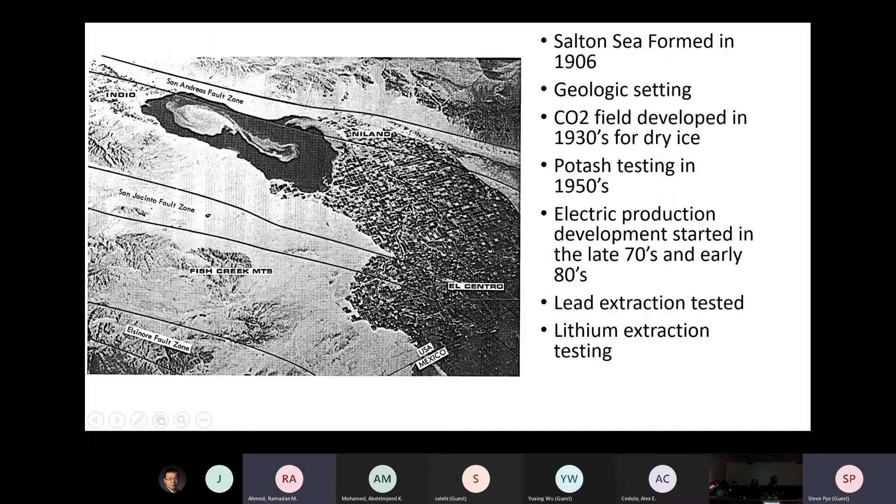So initially, two power plants were built, one on the Brawley field. Let me see if I can go back. Brawley field was in this area up here. The Salton Sea Field was down on the border of the Salton Sea in this area. So two 10 megawatt plants were built. One was on the Brawley field, one was on the Salton Sea Field.

And their contracts were conventional. The plants, which were operated by Unocal, sold steam to San Diego Gas and Electric in the case of Brawley, and Southern California Edison in the case of the Salton Sea. And those two utilities operated the respective generation facilities, turning the steam into electricity. And they were our partners in developing these geothermal resources.

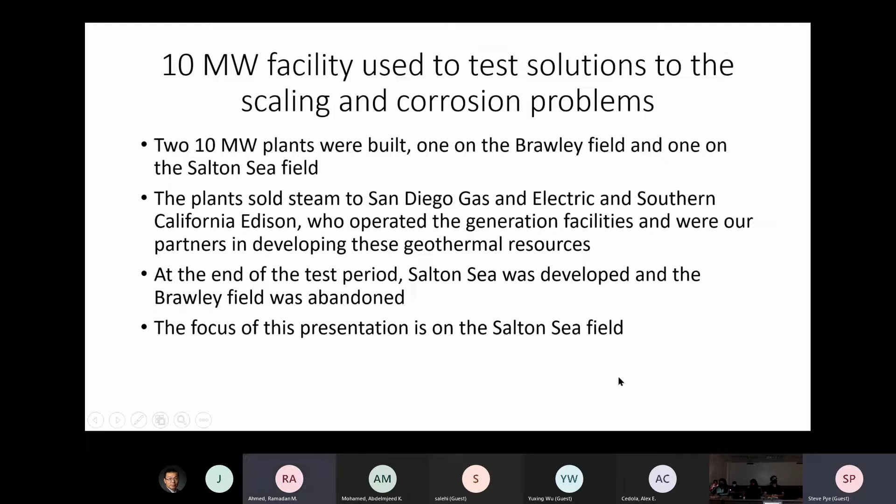At the end of the test period, it was decided to develop the Salton Sea and abandon the Brawley field due to its scaling and corrosion problems being worse than the Salton Sea. The focus of this presentation is on the Salton Sea, but I'll talk about Brawley a little bit from time to time too. So the two problems were corrosion and scaling.

So initially we used carbon steel casing as a sacrificial tubing string, and we used 7-inch to 13 3/8-inch casing hung from the surface as tubing, and it had to be replaced every 1.5 years on production wells and every 2.5 years on injection.

The corrosion on the carbon steel casing was wall thinning, which makes retrieval difficult because it gets so thin that when you put the slips in the table, it crushes the casing. And we had one incident where the well kicked and it wadded up all that casing underneath the BOPs. So that wasn't working very well.

Our corrosion research lab suggested we test 9-chrome-1 moly as kind of the next step up that might resolve the problem. And so we retrofitted the entire Brawley field with 9-chrome-1 moly, and it failed in 1.5 years. If you want to put lipstick on the pig, pitting corrosion was substituted for the general corrosion, so we didn't have any trouble retrieving the casing anymore. But it wasn't lasting any longer, and it cost a lot.

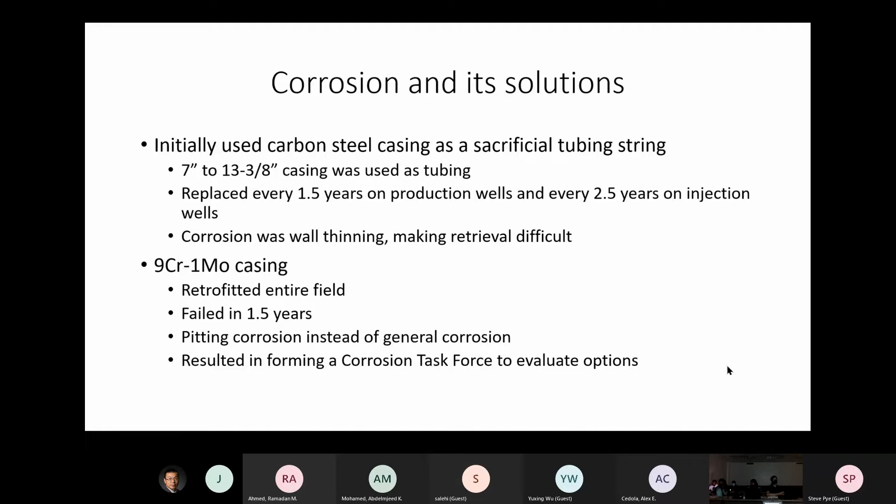So the task force had kind of a disagreement with management, and management came to accept our goals for this task force. There were people in management that thought that we should just figure out what we could afford and run that in the well, and if it didn't work, we quit. And what the task force decided is we needed to figure out what would work and then figure out if we could afford it. So it's a little different sequence.

So we started testing alloys. We ran alloy coupons downhole and pulled them out, and we discarded a bunch of alloys based on either crevice corrosion or cracking or accelerated corrosion. And the next test on that remaining list was to run 2 3/8 inch alloy tubing inside the 9 5/8 inch carbon steel tubing. In that case, we were able to examine the pitting on the outside in a full-size sample. And that further eliminated what we were actually going to test in the end.

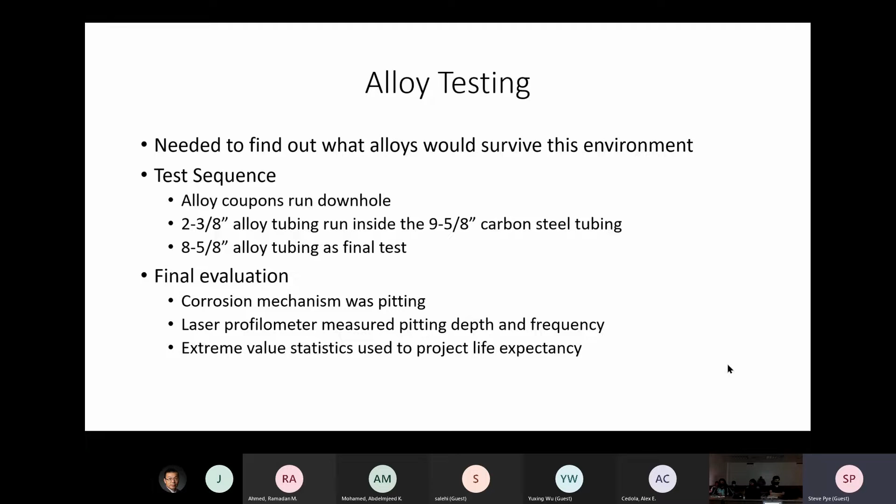So two alloys of the ones we were testing had a projected 30-year life: Beta C titanium and Hastelloy C276, which is a cobalt alloy. We ended up installing Beta C titanium in two wells.

And the Beta C was quite expensive. And so we were looking at ways of reducing the overall cost. And we did some experimenting with polymer concrete lined pipe. That's a styrene carrier and Portland cement as a particle inside it, and then it's spun at high speed and lines the interior part of the pipe.

And there was an overlay of Inconel 625 on the inside of the connections, and an elastomer that went between the joints. Then it was hung from the surface and went down into a Beta C polished bore receptacle. The seals on that polished bore receptacle were chevrons composed of carbon impregnated Inconel 625 wire.

So everything was high alloy, and those type of chevrons, of course, have no way to get energized. So you have to energize them with a spring, and so the spring was Beta C Belleville washers. It was run for 2 years, and then pulled out, and then run back. But it always gave people concerns over, well, is it going to get down behind that polymer concrete liner and chew on the pipe?

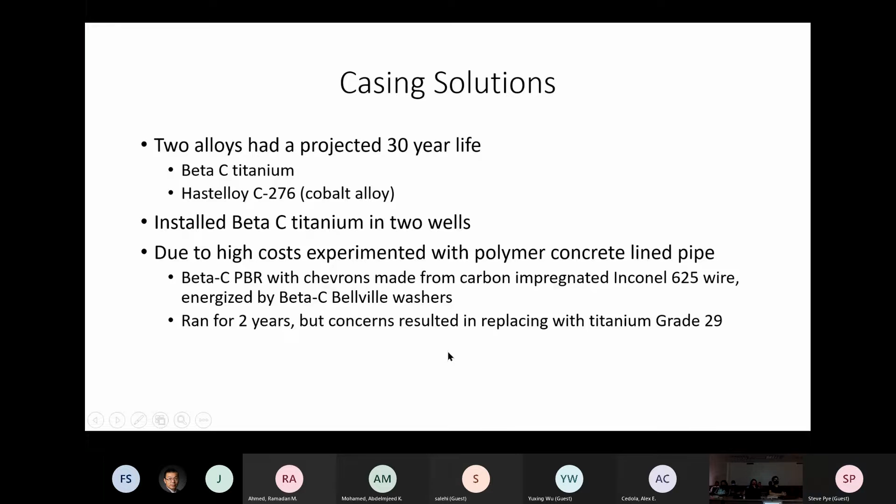And both the titanium manufacturer and our corrosion research people felt like it would survive fine if we went to grade 29, which adds a dab of palladium or ruthenium to the 6.4, and that turned out to be true. But we didn't initially test it because we didn't have that available. It was under test at the time we sold the project to CalEnergy.

So we get to this point of, okay, we've got a couple of wells with Beta C, and the rest still have carbon steel tubing strings. And if you have to do a well workover every year and a half, and you don't have enough in the budget for that, you sometimes let it go on too long. And then the tubing falls apart, and the cemented carbon steel casing gets exposed to the corrosive brine.

And in one case, it perforated that outer carbon steel casing and pressured up a shallow zone. And when somebody drilled a well into that shallow zone, it resulted in a blowout, and the rig cratered into the hole. And so it was decided that we needed to retrofit all the wells with grade 29.

And the Beta C, it's been long enough now. The Beta C's lasted 20 to 30 years. The grade 29 has lasted about 30 years. So it's also at about the end of its life now. We ran similar experiments on the injection wells, and ended up with 2507 duplex stainless steel casing as the preferred alloy.

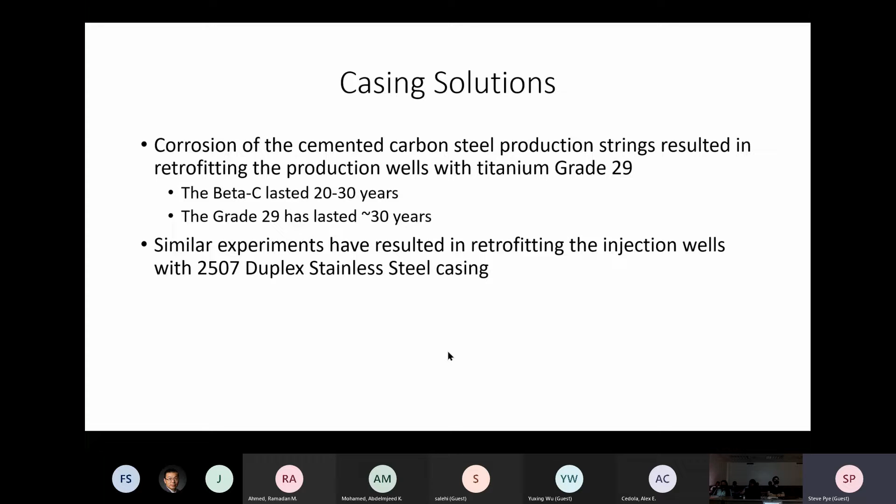So then it came, well, okay, none of this is cheap. What can we do to reduce the alloy part of the well costs? Well, we were at a significant advantage because the wells produce open hole, so we only had to case with the alloys to the top of the reservoir. The other part was doing a bunch of wellbore modeling and reservoir modeling, because if we could get more megawatts per pound of alloy, it would reduce the cost of the well field.

And so the larger diameter production wells will produce more with less alloy if they have enough productivity, KH, permeability thickness. And the problem was the production becomes inhibited by the friction pressure drop in the two-phase region of the wellbore. So briny salt water comes in the bottom that's hot, about 580 to 600 degrees Fahrenheit. It travels partway up the well where the pressure drops, and part of it starts to turn to steam.

Then you're flowing at very high velocities with a steam and water mix. And that steam and water mix creates a lot of friction pressure, which then limits the amount of drawdown you can put on the reservoir. So for the most productive wells, it looked like 16-inch casing was the best size to minimize the costs, and 13 3/8 casing for the less productive areas.

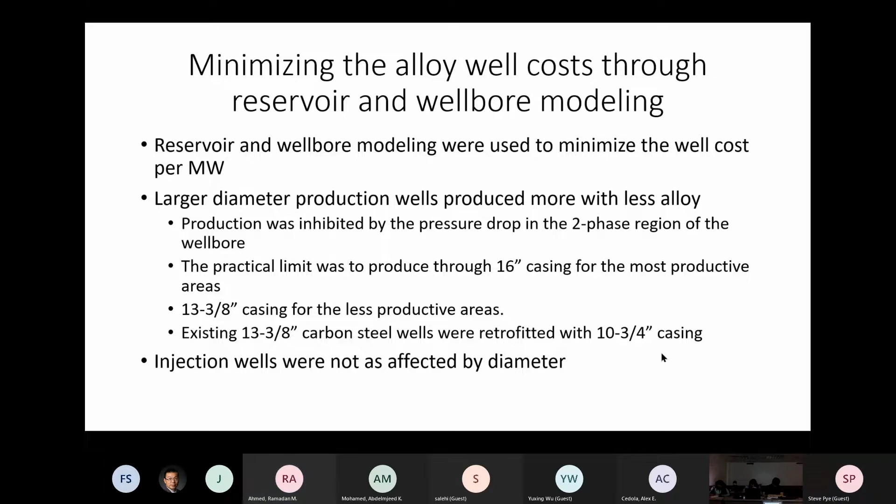So, like we talked about, what can you afford? And there's been some changes in the contract terms. As I talked about a minute ago, original contracts were steam sales agreements with utilities. That is, we developed the steam field and we sold steam across a fence line to the utility at a certain price per

pound. What happened was that we went into a period where the utilities were forced to become transmission facilities and they had to sell off all their generation facilities. For the transition, there was what was called a standard offer 4 contract available for a 10-year fixed period to bridge the transition from the current system to the independent system operator, ISO market, we have today in California.

Unfortunately, the pricing under the ISO is marginal to the Salton Sea resource at the current time, which has limited the amount of development that has occurred.

So one other thing that we probably need to discuss is what are the differences between some of these things. And thermal stress is an important factor. The thermal stress is the modulus of elasticity times the coefficient of thermal expansion times the change in temperature. And so if you're going to do it in degrees Fahrenheit for the coefficient of thermal expansion, then the temperature change is also in degrees Fahrenheit.

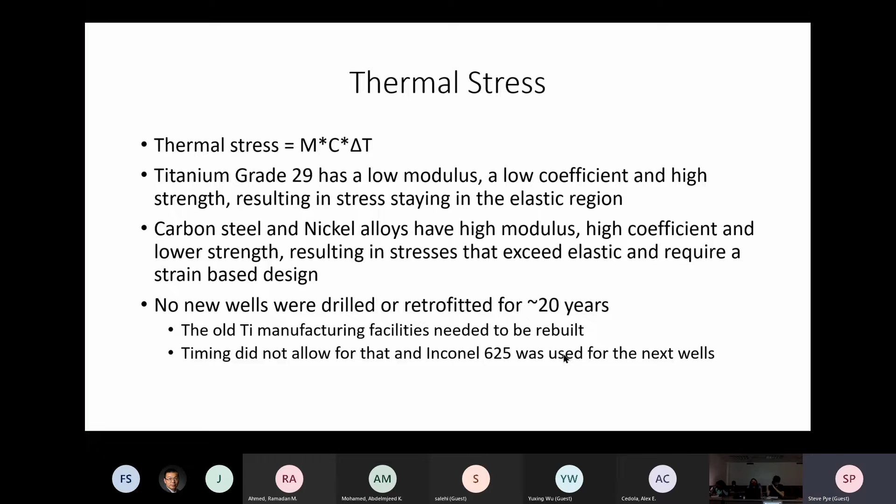Now the reason we never tested that is Inconel 625 has a very high heat strength, and so it can't be manufactured as a seamless pipe. It can only be manufactured as a rolled and welded pipe. And when you have a rolled and welded pipe, you can only have integral joint connections. We have to change the slide. So that limits you to integral joint connections.

There were some wedge type threads that had 80% of pipe body yield strength, but the manufacturer and the owner of that technology would not work with us to put it on the Inconel 625. And so the available connections had only 40% of pipe body yield strength.

So go back to the thermal stress. Now you've got pipe bodies that are going through yield, and you have a connection between them that only has 40% of the pipe body strength. And so a lot of the compression is going to happen in the connections, and they aren't really suited for it. And so the Inconel 625 was run and cemented, but it had some connection failures.

We ended up repairing the connection failures with scab liners, but one of the wells, every time we put a scab liner in it, it just moved the stresses around, and that caused another failure.

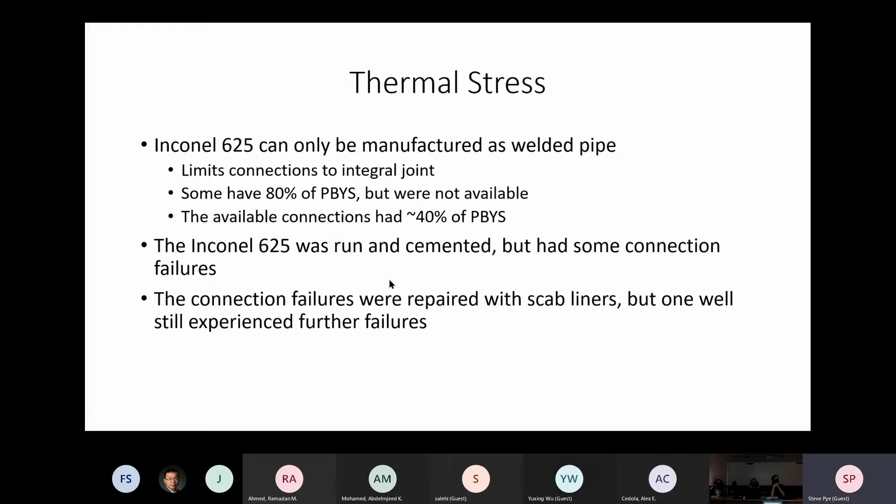As a result, we needed to figure out how to make these connections last, and we started working with the reluctant manufacturer, and he was willing to work with us this time as long as we were paying the bill. And so we did some testing similar to ISO 12835, where they take the pipe and put it into a fixture that holds it so that it can't expand or contract, and then heat it up and cool it down, and heat it up and cool it down, and then use strain gauges to monitor how that's moving.

Now in ISO 12835, they actually use nitrogen pressure testing to monitor the leaks, but this particular joint was not a gas tight joint, so we couldn't do that. So we relied on the strain gauges. We tested 2 wall thicknesses, and we tested them for 16 cycles. There were some permanent strains in the thinner wall thickness in the last 2 cycles, and none in the thicker wall, but both were considered acceptable. So one well has now been completed with 13 3/8 over the original 16-inch 625 casing. And so far, so good.

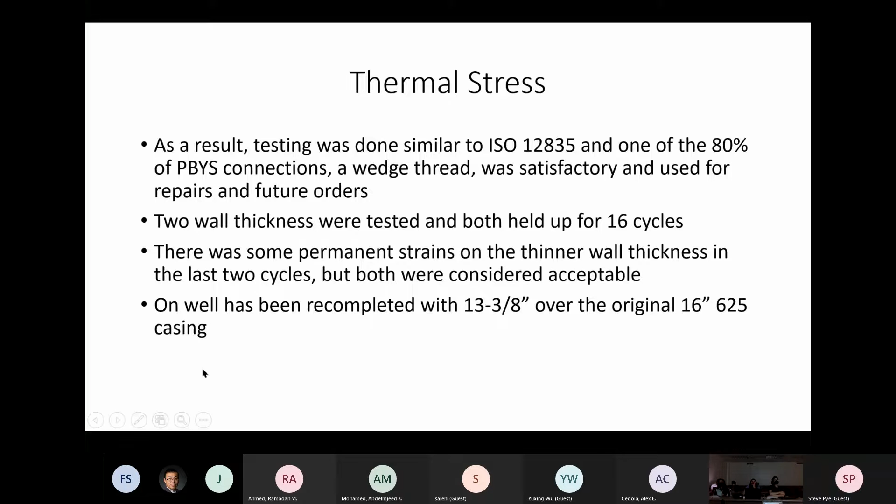So we're going to switch into the other cost item for the Salton Sea, which is solids precipitation and scale. The brine is near saturation with silica at the bottom hole temperatures, and so you end up with a lot of silica scales. Silica takes a while to precipitate, so it doesn't necessarily give you a lot of problems in the production wells, but in the surface facilities and in the injection wells, it piles up a lot of scale.

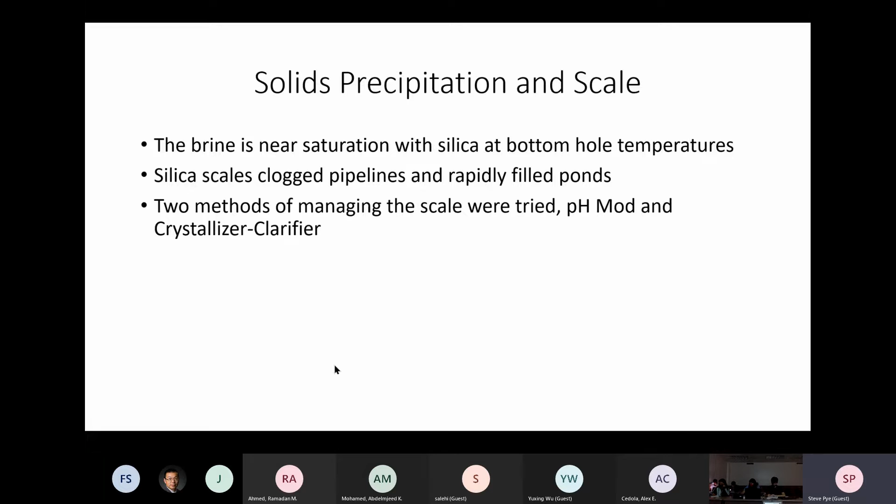So we did experiments with 2 methods. By experiments, I mean the whole system was changed from one to the other. And that was back in the days when we had those pilot plants. So 2 methods were tested: pH modification and crystallizer clarifier. So if you take the brine and you lower the pH, it delays the precipitation of the silicates. You have to be careful about the balance, because if you over treat with acid, it'll accelerate the corrosion. And if you don't put enough in there, then you've got silicate precipitation.

But if you get it just right, it would inhibit the silica until after it got back out in the formation and reheated, and so it would never precipitate. This required keeping the surface brine hot through the system with an injection temperature at the surface of 250 degrees Fahrenheit. Because of system upsets, this process was abandoned after a couple of years of testing. The problem being that we couldn't really balance it with the measuring capabilities.

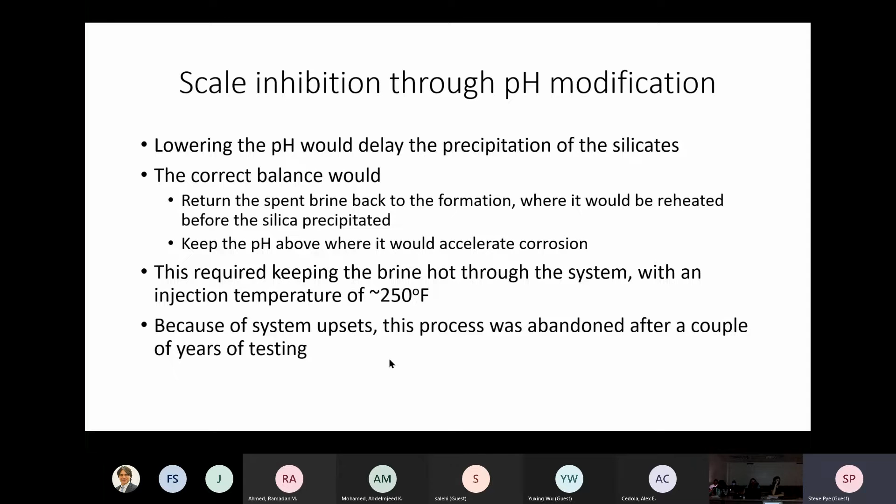You ended up with some two-phase flow or some carryover of steam, and the measurement system wasn't able to handle all that and manage the acid addition, particularly when changes were quick. And so we ended up with either corrosion or scaling. It's still used in the binary plants. So the brine goes through binary plants, not in the Salton Sea, but in some other areas. And the pH is then brought down a little bit to keep the silicate in solution, and that works okay. You don't have the two-phase problem.

So in the crystallizer clarifier testing, unlike the pH mod option, where precipitation was inhibited, the crystallizer clarifier's intent is to precipitate all the silicates, keep them as non-toxic solids, and dispose of them in a landfill. And so you've got a large chemical plant where you're recycling seed crystals, and then there's a clarifier and thickener to concentrate the solids, and a belt press to produce filter cake for disposal.

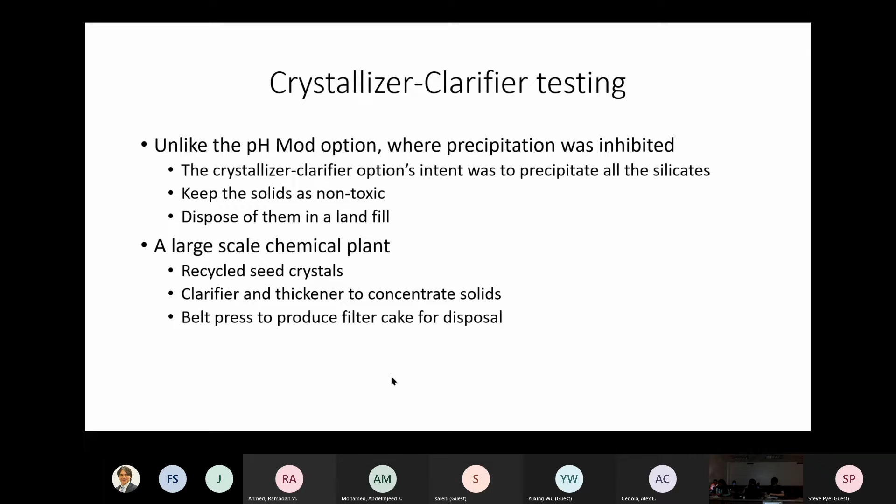So we found that there was a problem with the sulfate. The sulfate resulted in precipitation of barium sulfate and strontium sulfate. Strontium sulfate is highly radioactive. And so we ended up having to put inhibition chemicals into the flowing stream to prevent the naturally occurring radioactive materials from forming.

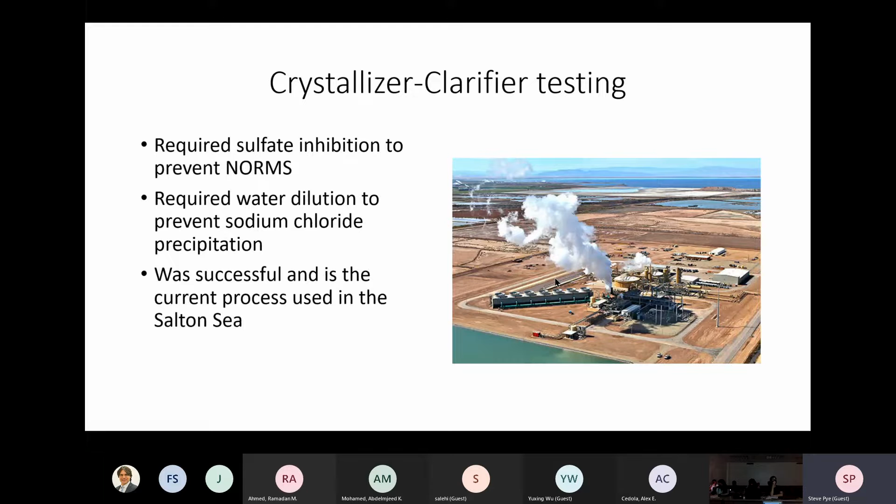And it also turned out that we were very close to the saturation limit for chloride as you remove the water from the system through forming steam, and it required a little bit of water dilution to make sure that it didn't precipitate. The process was successful, and it's the current process in use in all the power plants at the Salton Sea. So I get to some of the other things that were tried and are still being tried.

A plant was built to extract zinc, but it had a bunch of process difficulties and corrosion. The zinc comes out one end, and this horribly acidic sludge comes out the other end and has to get injected into the reservoir. And so they couldn't resolve how to do that in a way that was going to be economic. So they abandoned that project in 2008.

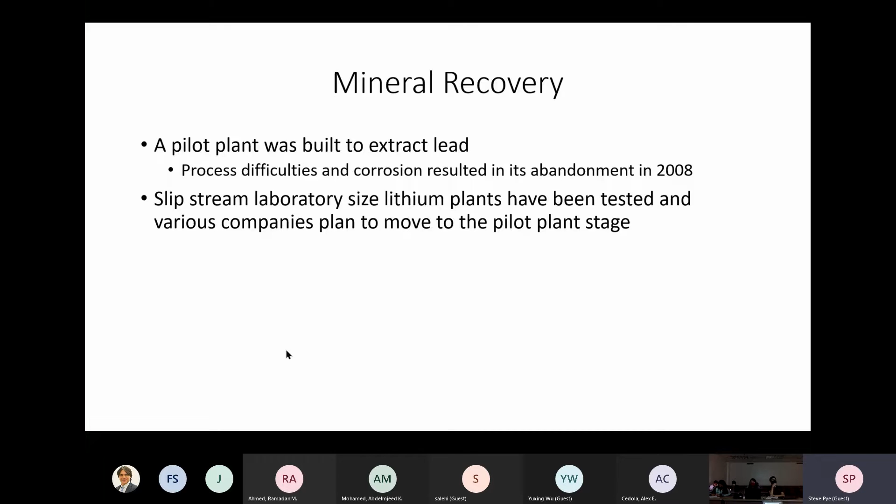There are currently a number of slipstream laboratory-size lithium plants being tested, or some have been tested and put away for use. And various companies plan to move to the pilot plant stage to recover lithium for batteries. The current opportunities in the field.

California has recently required the utilities to purchase an additional 1,000 megawatts of geothermal power. And they are out to bid to buy that amount of power, which may result in a competitive price that will make further development of the Salton Sea possible. The lithium process may provide some additional revenue if they are successful.

Now, the other thing I forgot to mention is with the Salton Sea level going down, about half the Salton Sea Field is underwater or was underwater. And as the sea level continues to regress, there'll be more areas that can be developed in the Salton Sea Field because they'll be dry.

Unfortunately, along with that, they're exposing that toxic materials mix, fertilizer and sewage, and it is a problem somebody's going to have to deal with, because it blows up dust, and the dust is toxic. But other than that, there's good opportunity right now if we can get adequate power purchase agreements under this new additional 1,000 megawatts of geothermal power. And I think I will stop there and let you ask questions.

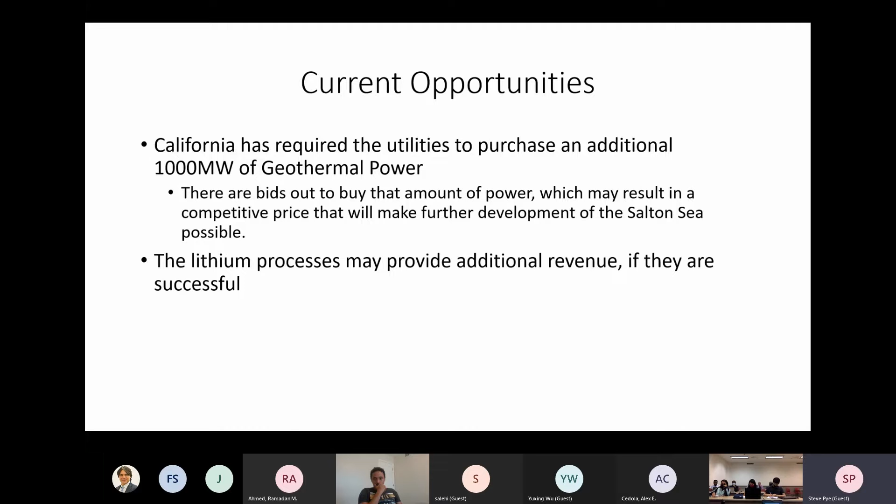So do we need the slides up anymore? I can stop sharing. Yeah, you can stop sharing.

So the initial contracts provided a fairly high price for the steam, and the power plant was all dealt with by the utility. When we got to the standard offer 4s, we were getting a good price for what we were selling. When they went to the ISO bid based on the nameplate capacity, the people with the lowest nameplate capacity bid ended up getting a contract where they sold based on bidding into the ISO. Prior to that time, there was a capacity payment and an energy payment. After the standard offer 4s, there was only an energy payment.

And the capacity that they were deciding what they were going to buy, so take solar power, for instance: you build a 10 megawatt solar power plant, but because the sun doesn't shine all the time, you only get about 4 megawatts out of it. And so when you look at the cost of 4 megawatts and 10 megawatts that geothermal is delivering, it's a lot cheaper in apparent capacity cost, but not in delivery cost.